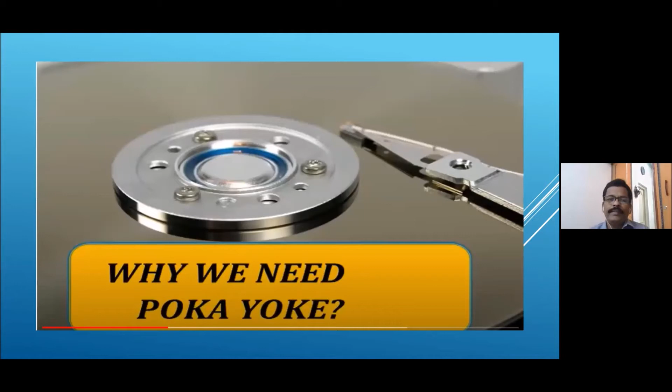So why do we need this Poka-Yoke? Most of the time we are blaming others when mistakes happen. Normally we say, I did not do it, it's his fault, it's not my fault, it was not me. All these things, we blame others instead of finding the root cause for the issue.

Normally, most of the time the mistakes are mainly because of human errors. Human errors include misunderstanding, forgetfulness, wrong identification, lack of experience, lack of standardization, unexpected errors, and intentional errors also. Sometimes people will make mistakes intentionally to create an issue, for example if there is some problem between a boss and him, he will make a mistake, and finally that leads to a component defect or some scrap.

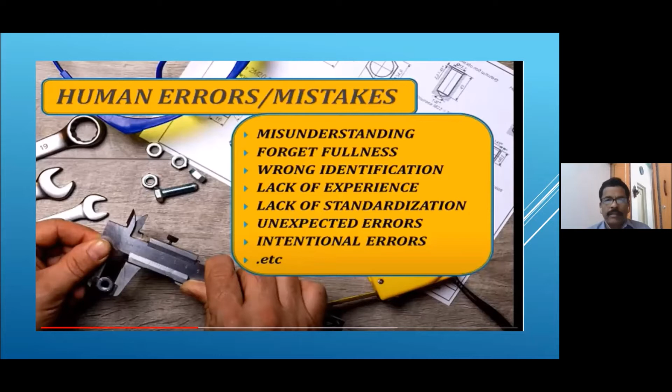So before going to Poka-Yoke, we would like to know why we need to implement Poka-Yoke. Otherwise, without implementation, why is it not possible to resolve the mistakes? For that, we need to understand about mistakes.

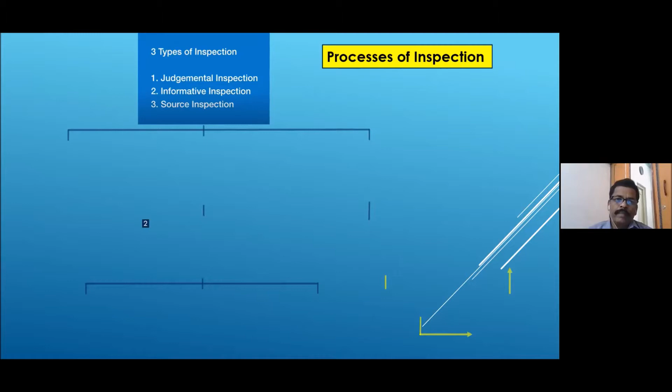The three types of inspections. Inspections are very important in the manufacturing line. The three types of inspections are judgmental inspection, informative inspection, and source inspection.

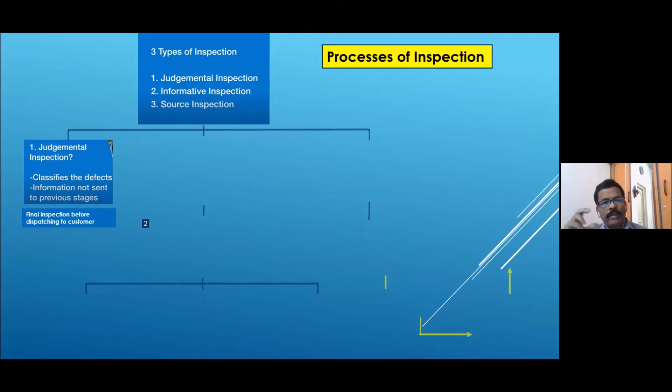Judgmental inspection is nothing but the final inspection. Before delivering the component to the customer, all components need to be inspected thoroughly, and the defects and problems are collected, but that information is retained with them only. It will not go back to the respective department.

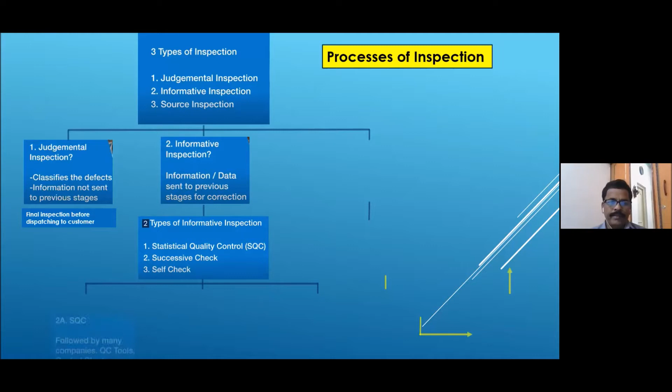The second inspection is informative inspection. Informative inspection is information and data - they collect the information and data and pass it on to the previous stage to stop or eliminate the error. The informative inspection contains three stages: statistical quality control, successive check, and self-check. Statistical quality control is followed by many companies using QC tools, control charts, quality circles, etc.

A successive check is when A sends a component to B, and B checks every component before starting the process. That means before producing the component, B will check all the components thoroughly. That is a type of successive check.

The self-check is when A sends components to B, and A checks every component immediately after producing it, before sending to B. So after producing the component, A will check the component parameters thoroughly before passing it to the next process, so that in case of any error, that component will be held at that particular stage itself. That is called self-check. Both judgmental inspection and informative inspection will not stop or eliminate the error or defect.

So it will reduce defects, but the defect may repeat again. So how do we stop defect production in the manufacturing line?

Through source inspection. Source inspection means all the parameters are checked before producing the component - that means machine parameters, fixture parameters, component parameters, all these things we need to inspect thoroughly. If those parameters meet the standards, then only the component will start producing; otherwise, the particular issue will be resolved and then they will start producing the component.

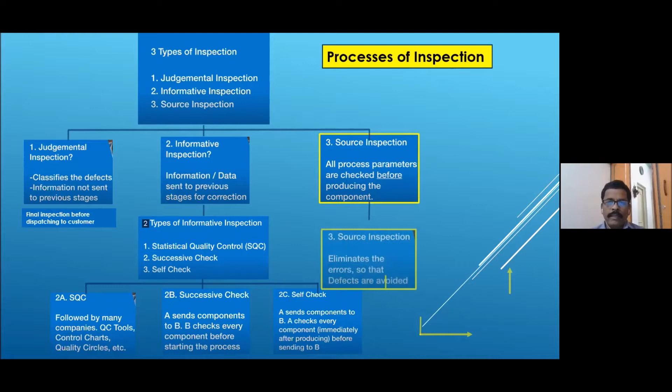That means source inspection eliminates errors so that defects are avoided. Source inspection results in zero QC - eliminating the quality control activity. Source inspection is achieved through Poka-Yoke. This is how Poka-Yoke works: even though the inspection process is there, problems repeat again, but the volume of defects is reduced even though defects repeat. How to eliminate it 100%? That is the purpose for which Poka-Yoke has been created.

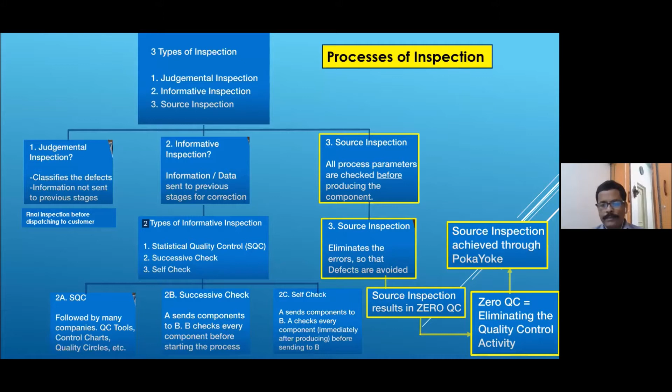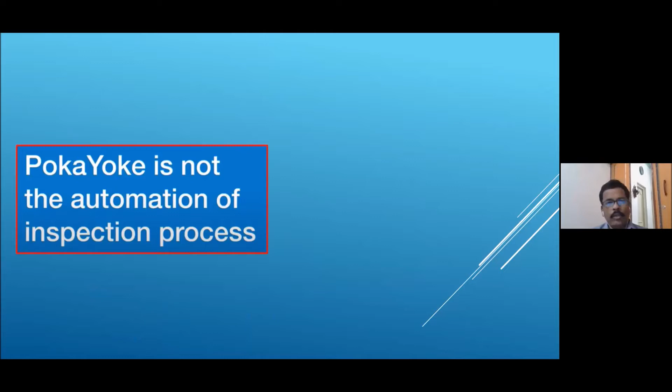Poka-Yoke is not the automation of inspection process. Many people think Poka-Yoke is the inspection process itself, or that if they create some methodology to identify the defect, that is Poka-Yoke. No, that's not Poka-Yoke.

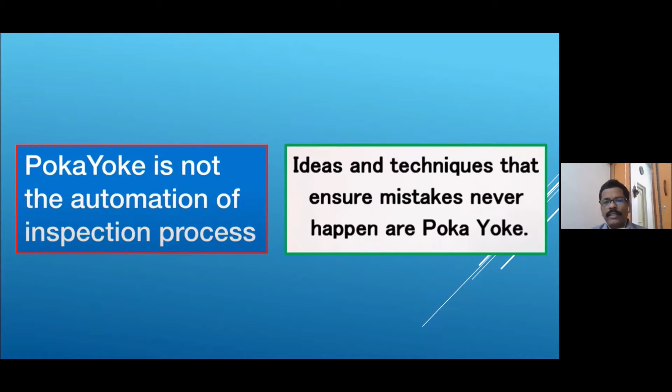Poka-Yoke is actually ideas and techniques that ensure mistakes never happen. Before producing, at the time of manufacturing itself, we need to identify the idea or technique we need to implement so that mistakes never happen in the manufacturing line. That is called Poka-Yoke.

There are two types of Poka-Yoke: the setting method and the regulatory function method. The setting method is how the system works - we need to understand and develop the Poka-Yoke. The regulatory function is how the system communicates. By understanding that, we can develop the control type Poka-Yoke and alarm type Poka-Yoke.

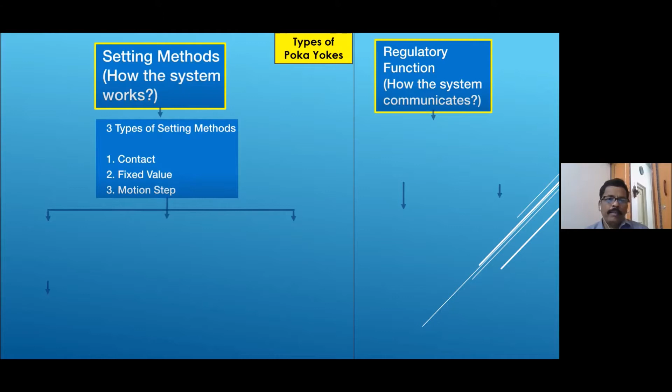The three types of setting methods are contact method, fixed value method, and motion step method. The contact type is like a USB pen drive - these are all contact type Poka-Yoke. Defect is prevented through contact. So if you reverse a USB pen drive, you can't fit it into the slot. That is the contact type Poka-Yoke.

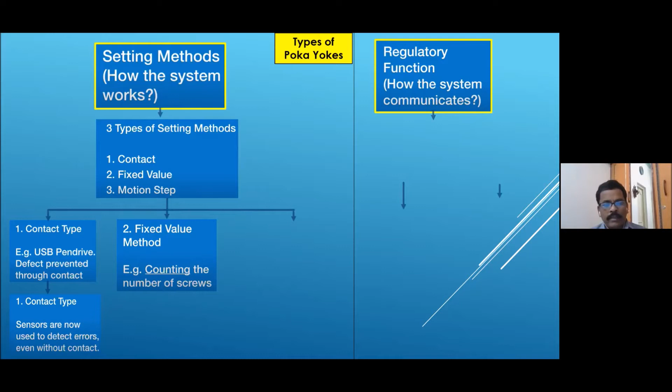Sensors are now used to detect errors even without contact. The second one is the fixed value method - counting the number of screws. In a manufacturing assembly line, you have to put 10 screws. If you put only 8 or 9 screws, the system will not allow further production. That type of Poka-Yoke is called the fixed value method.

The third one is motion step, which follows the sequence of activities. Suppose you need to assemble a product in a particular sequence, but you miss a step - the system will not allow you to proceed to the next step. It's called motion step. These three are all called setting methods.

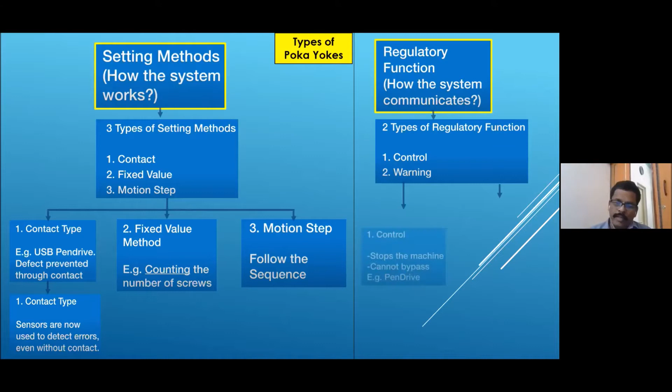The regulatory function method is how the system communicates. There are two types: control type and warning type. The control type will stop the machine, and you cannot bypass the system. It's called control type.

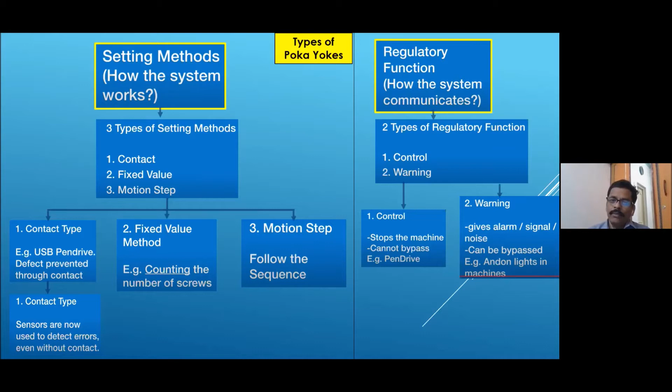Warning type gives an alarm signal or noise, and it can be bypassed. Out of these two, control type Poka-Yoke is always better, because with warning type Poka-Yoke, there's a possibility of the operator bypassing the alarm, which can produce a component with a defect. So always think of the control type.

There are 10 errors where you can use Poka-Yoke. Number one, processing omissions - a step was forgotten. For an assembly or production process, various steps are there. If you forget to manufacture a particular step, the process will not allow you to the next level. That's called processing omission - a step was forgotten.

Number two, processing errors - something was done incorrectly. Suppose drilling and boring operations are there. Instead of drilling, if you start directly with boring, it will damage the tool. So the machine will stop, and will not allow the boring process without the drilling operation first. It's called processing errors.

Number three, error in setting up the workpiece. Before mass production, you have to set up the fixture or jig. Any error made in the fixture or jig will lead to component scrap. So your Poka-Yoke system will not allow that type of error during manufacturing.

Assembly omissions - a part was forgotten. You have to assemble one gearbox with various parts, maybe 50 parts. If you miss one part of the gearbox, it will lead to a defect, noise development, or it may get damaged. If you implement Poka-Yoke in such an area, the system will not allow the assembly process to proceed further.

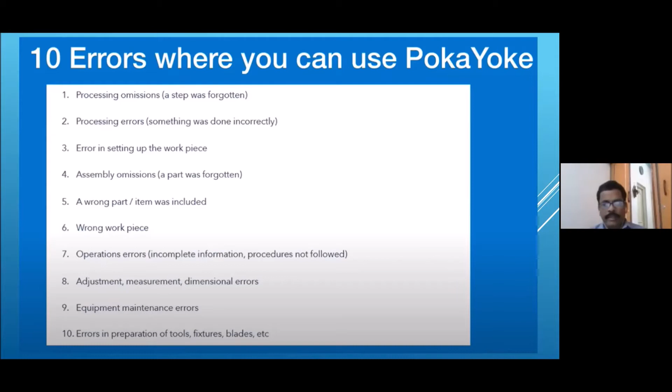There are 6 ways of using Poka-Yoke: elimination, replacement, prevention, facilitation, detection, and mitigation.

The elimination of unwanted processes or mistakes means downloading machine data rather than entering it manually. Nowadays machines run with CNC, computerized numerical control. For every product you have to change the program, and many times people enter the program manually, which leads to manual or typographical errors that cause component defects. To avoid that, you can scan the data or copy paste it. If you do it like that, errors won't happen, and you can manufacture mistake-proof or defect-free products.

Replacement means replacing the step with a more reliable process, such as scanning data instead of manual entry. In your final assembly area, many people enter barcoding numbers manually. Instead, you can scan the barcode and deliver the product to the next stage. That will reduce or eliminate the error permanently.

Number 3, prevention: change the process so that mistakes are not possible to make. For example, a USB pen drive - even if the operator tries to make a mistake, he can't. That's the way you need to develop the Poka-Yoke system.

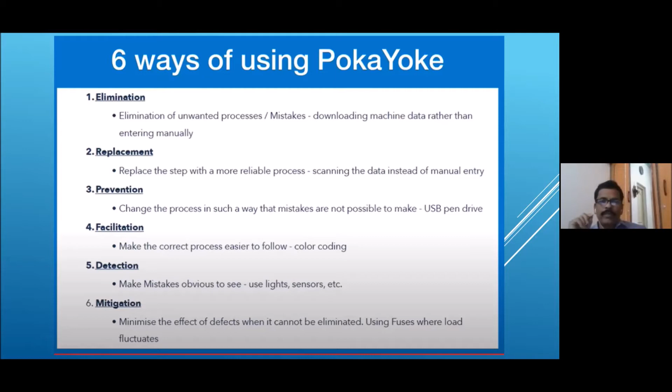The benefits of Poka-Yoke include reduced training time - anybody can be engaged with machine operation, even operators with very little knowledge of the machine area, if strong Poka-Yoke is implemented in the machinery. Even if the operator tries to make a mistake, the machine will not permit starting; otherwise it will indicate to the operator to fix it properly. Other benefits are improved safety, reduced waste (scrap or rework is eliminated), higher productivity since we can produce more components, and promoting a culture of continuous improvement. Operators get motivated, and the culture of the total organization also changes.

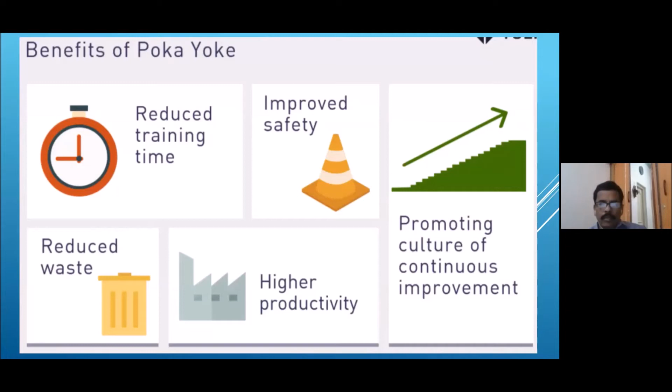Steps towards implementation of poka-yoke: there are four stages when implementing poka-yoke, for how to set up mistake proofing. Step 1 is to keep firmly in mind...

Everyone makes mistakes, but I am responsible for those mistakes as a manager. Sometimes managers think it is the operator's job - they were given the job and recruited with a salary, so it's their responsibility to produce components without mistakes. Some managers think this way, which demotivates the operator and affects their morale. Instead, you should think it is my responsibility to eliminate the operators' mistakes by providing a proper poka-yoke or foolproofing system - it's attitude related. You may think that's just mental theory, but as long as you blame others or your workers, you cannot think of poka-yoke. If you simply blame an operator, your mind will not work, and you cannot introduce any poka-yoke ideas. It's more important than you think to change your mindset, and I will make poka-yoke.

So you have to think, yes, it's possible to make poka-yoke. So how to make poka-yoke? You have to think positively, then your mind will give more ideas. I'll make the poka-yoke process - in order to do that, what should I do?

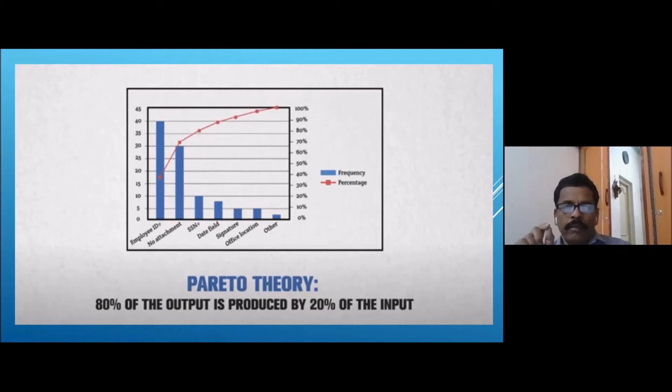Step number 3: find the root cause of the vital few mistakes and design a control poka-yoke or warning poka-yoke. After Pareto analysis, we have to find the root cause and take permanent action for the defects. With that, we have to finalize whether it should be a control poka-yoke or a warning poka-yoke, decide, and implement it further.

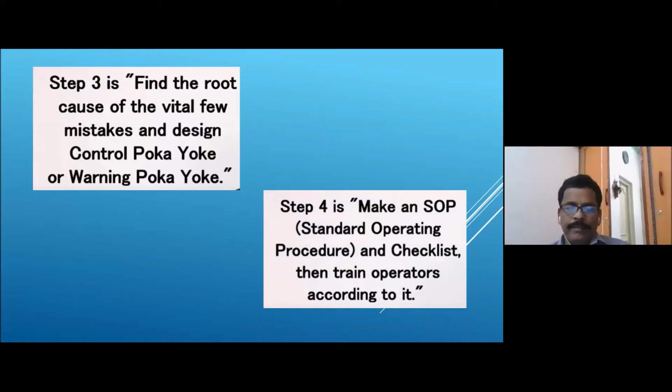Step 4 is to make an SOP, standard operating procedure, and a checklist, then train the operators accordingly. Once poka-yoke is implemented, make an SOP and a checklist. With that, you have to train the operator, then implement it. This is the way - totally 4 steps are there in implementing poka-yoke.

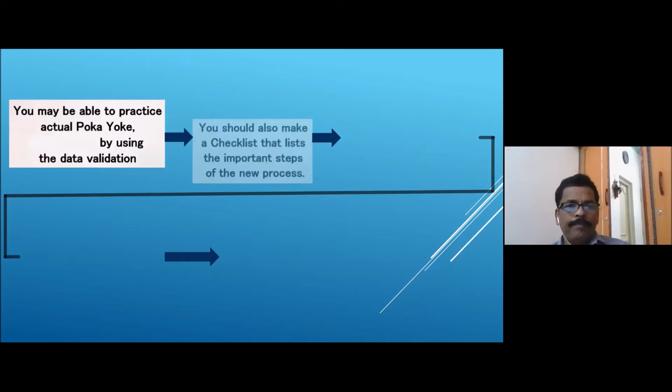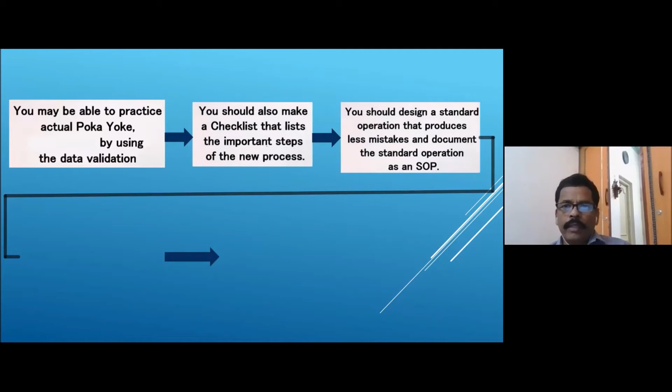You may be able to practice actual poka-yoke by using data validation. Then you should also make a checklist that lists the important steps of the new process. Step 3: you should design a standard operation that produces fewer mistakes and document the standard operating procedure.

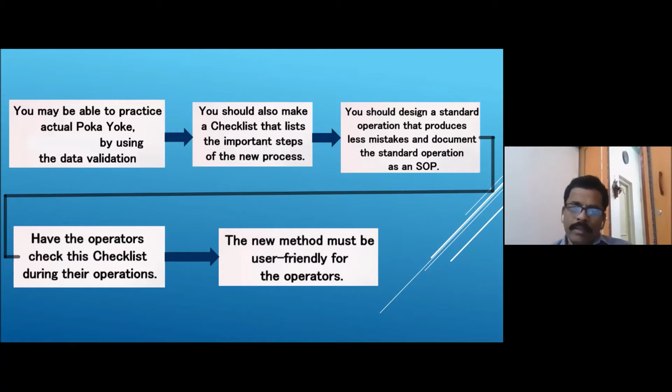Have the operators check this checklist during the operation. We have to discuss with the operator, or they will get demoralized. The new method must be user friendly for the operator - this is very important. If it is not user friendly, the operator will try to bypass the poka-yoke system and produce a component without your knowledge. It should be user friendly.

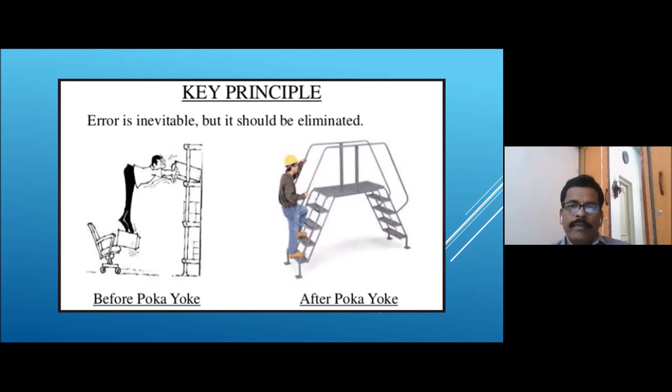Simple example of poka-yoke: before poka-yoke, the person tried to pick some boxes which could lead to an accident for him, and the component falling down could damage it. We have to make a poka-yoke and develop a system to ensure no mistakes happen to humans - a permanent disability may occur, and the component may also be damaged, affecting profitability.

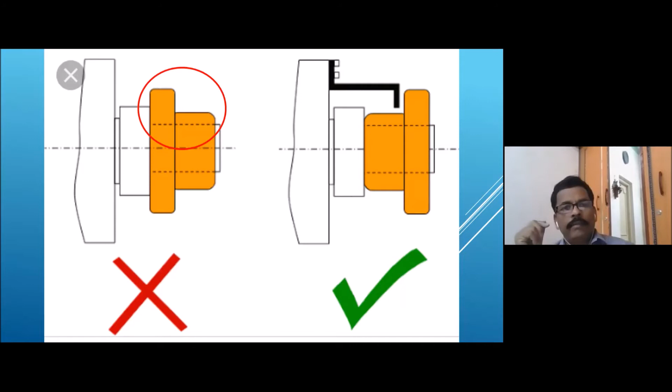You see these two components - one is the okay method, one is the not okay method. This component is wrongly fitted. Why is it possible to fix it both ways? You see this is a spindle; on the spindle a fixture is there, and on the fixture some component is fitted. The component configuration is able to fix in both ways, which could lead to an accident of the equipment or machine, or damage the component.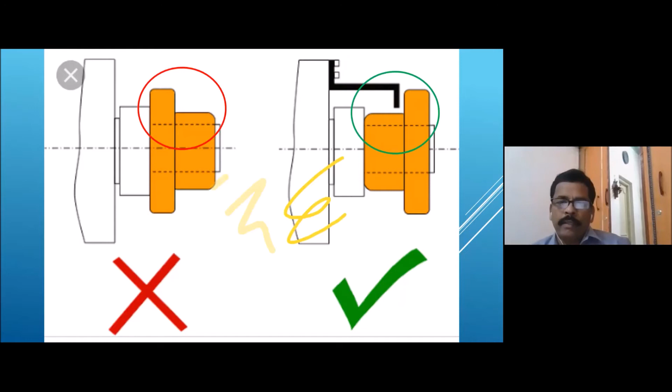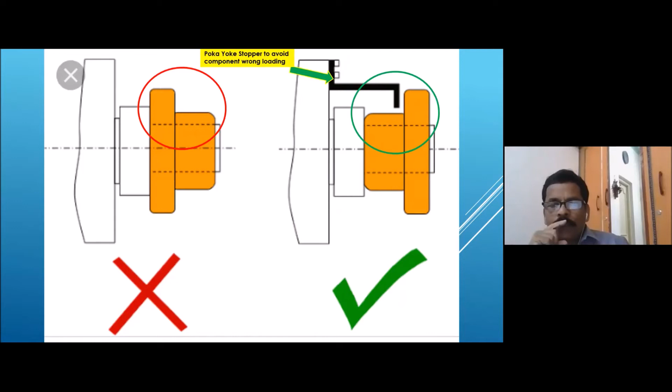This is the okay way - the right way to fix a component. This is the poka-yoke idea: a bracket which will stop the component from being pushed inside the fixture in the wrong way, so it will not permit the operator to fix the component incorrectly.

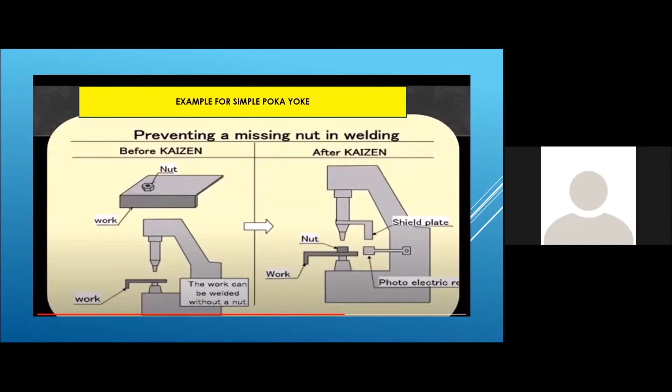Another example of poka-yoke: here, this work can be welded without the nut also. You see both pictures - one is work where the nut is fit, which is actually a spot-welded type of nut. It is possible, even if the work plate is not there or the nut is not fixed, to still proceed to the next operation.

You see the second picture - a photoelectric sensor is introduced. In case the nut is not fixed on the work, what will happen? The press ram will come down, it will be sensed by the photoelectric sensor, and it will stop the equipment. It will not weld the component or damage the fixture, so the product cannot be delivered without the nut. This is a simple way of implementing poka-yoke.

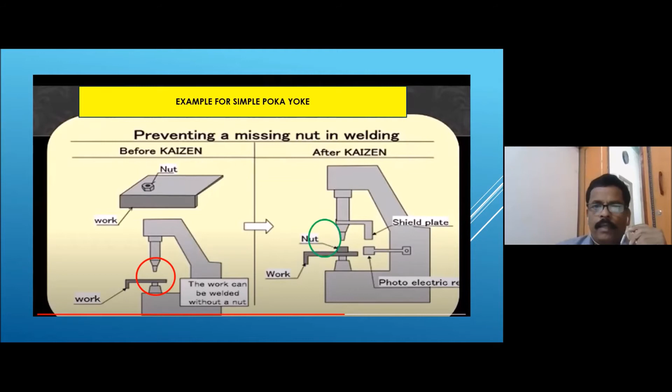Welding cannot be done during absence of nut. If nut is not there, the machine equipment will not weld the fixture, or it will not damage the workpiece.

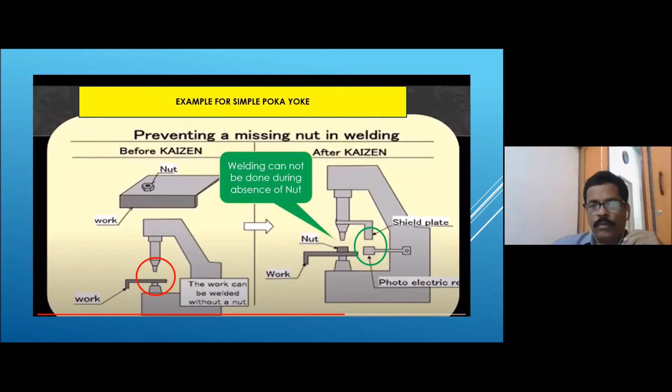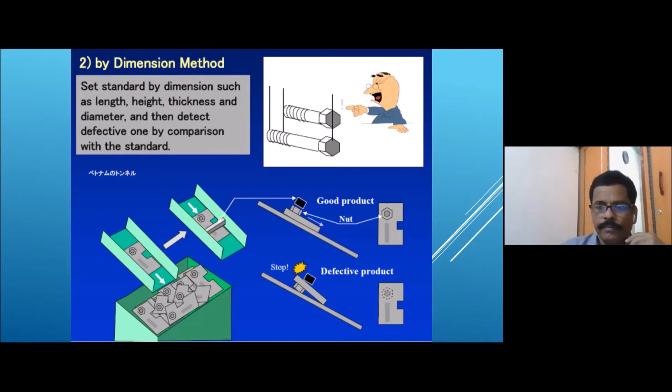This is also a shape method. This is the right component, defective component, and a good product - two types of products are there. If both come in a mixed way, people will think why we are allowing defective components into the process line.

These are all human errors. It may happen sometimes because of operator error, or at the IQC inspection, the input quality inspection area, they miss out 1 or 2 components out of 1,000 components. They will miss one defective component.

What you have to do is introduce a small type of conveyor. In case the pin type component is not coming in properly, it will not permit the next process. That is how you need to develop the poka-yoke system.

You see the second picture, the defective product and correct product. The component can be fixed in either way. To avoid that, if you introduce a small guide pin, it will permit the component in the particular correct way only. Otherwise, it will not permit the operator to fix the component on the fixture.

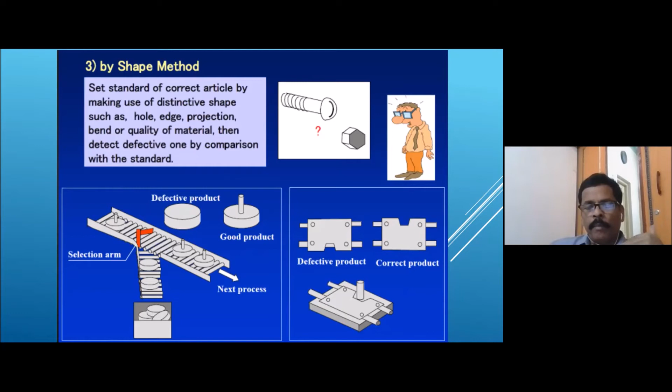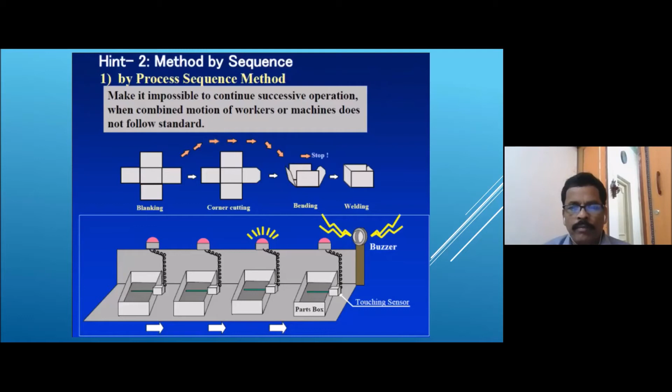This is also the same way, a sequence of operation - A, B, C, D, E, F, G, H, I - these are the stages of the assembly line. In case at A, B, C, D you are not picking up the component or not ensuring stage by stage, if you are not ensuring the E process, then it will stop your cylinder operation at the final end process.

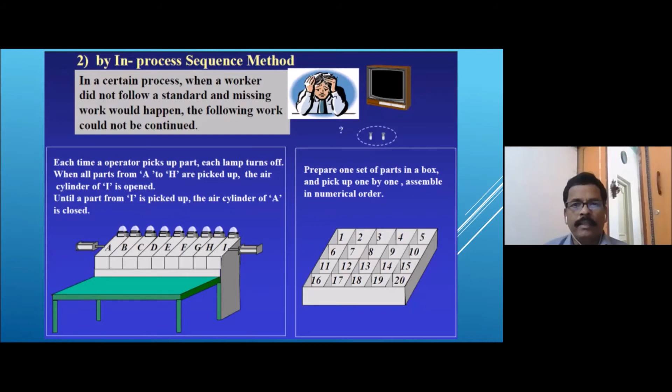Like that, you have to think according to your process to ensure there is no defective piece or component goes to the customer or next step. That is the purpose of poka-yoke.

It is detecting a fixed number. Numbers such as pressure, electric current, temperature, or time and so on are fixed to control. When detected numbers exceed the value, the work or operation cannot be continued.

For example, equipment air pressure - normally 6.5 kg per cm square pressure is required for machine operation, that is the minimum pressure. We must ensure the pressure meets specification; otherwise it will lead to accident or component ovality or bore ovality. That's why ensuring air pressure is very important.

Temperature - in some washing machines and similar equipment, the temperature of the liquid is very important. The temperature of the liquid should be more than 80 to 90 degrees; if it is only 50 degrees, the component may produce a defect in the next process. So we need to ensure the temperature of the particular liquid in the equipment.

Oil level - hydraulic oil level, lubrication oil level, coolant oil level, many oil levels are there. In case oil levels are low, the machine will malfunction, leading to accident or producing a component defect.

Thickness, electric current, voltage are also very important. During welding operation, if the current and voltage are not set properly, it will produce a defective component. All these we can automatically link with the poka-yoke system.

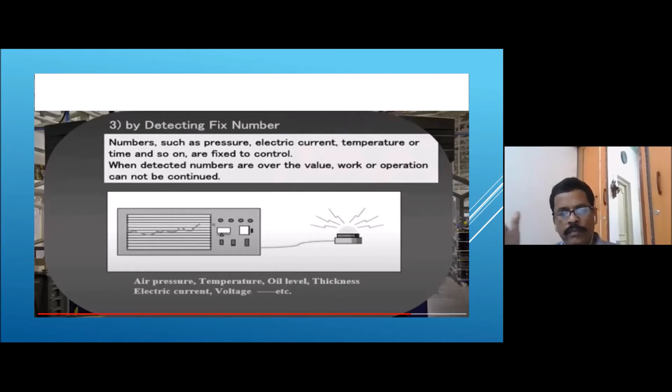Likewise, you see here equipment - all the washing machines. The washing machine temperature is very important, along with the time factor. If it exceeds the time, the component may also get damaged.

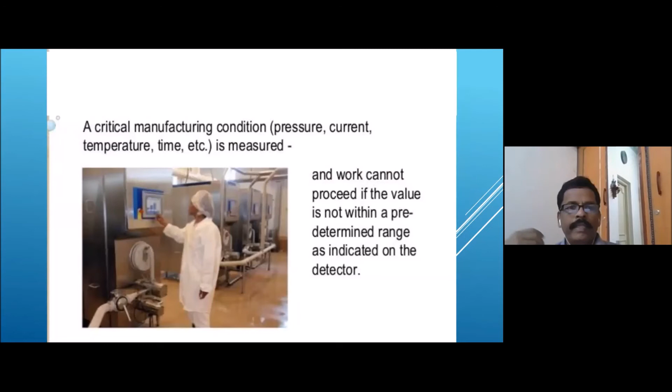Motion stop. This type of device ensures that a correct number of steps have been taken and possibly also a sequence of steps. An example could be the use of a nut runner to tighten a specific number of bolts to a required torque.

Suppose there is an automobile gearbox. When you fit the end flange, there are 10 bolts. If you don't tighten all the bolts equally, it may lead to oil leakage from the gearbox. The sequence of tightening is also important. Opposite bolts should be tightened; if you continuously tighten the peripheral bolts, it will lead to mismatching of the end flange and also cause oil leakage.

To ensure proper tightening, the proper torquing of the nut runner is very important. If you tell the operator to tighten the nut properly with a particular torque using a torque wrench, they will tighten it, but for some components or companies, operators may not tighten properly with the respective torque. To avoid that, we can introduce this type of poka-yoke.

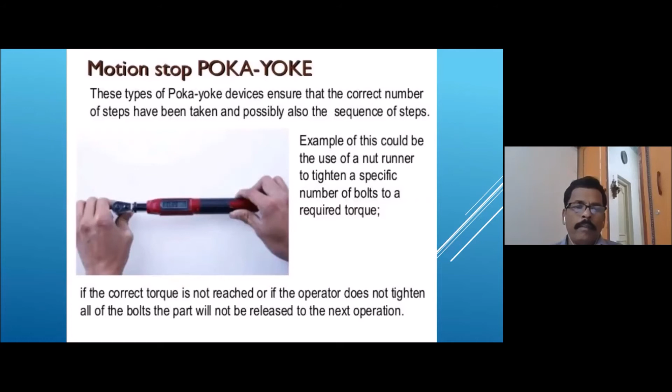So this ensures automatic torquing. When tightening 10 nuts or bolts, even if one nut is not properly tightened with the specified torque, it will not allow the component to move to the next process. This is a positive way of a poka-yoke system.

Poka-yokes are used in day-to-day life also. So far we've discussed manufacturing lines or mass production systems, but most of us think it's only applicable to manufacturing industries, not day-to-day life. That's not true - we use many poka-yoke mechanisms daily without understanding that they are poka-yoke.

You see poka-yoke 3-pin plugs in computers and many other devices. The plug has 3 pins - if you reverse the plug, it will not enter the socket. Same with a SIM card - everybody knows the SIM card has one corner cut flat. This is to avoid mispositioning of the SIM. If you try to position it in reverse, it will not enter the mobile phone.

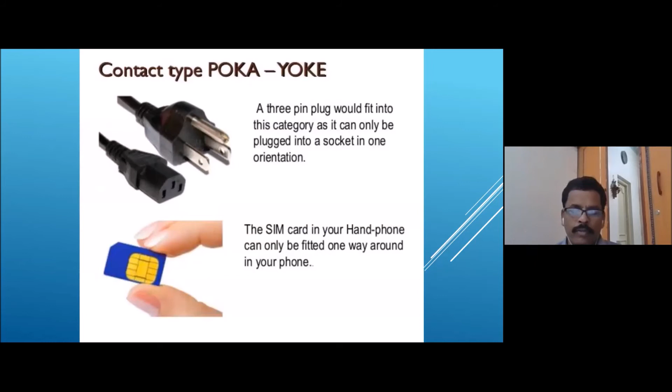Nowadays cars are integrated with collision warning and brake support. It will give a 10 meter collision warning to the driver, and even if the driver doesn't observe it, the automatic braking system will energize and stop the car.

The latest generation cars are equipped with collision warning and automatic braking systems. In case a collision may happen within a specified distance due to driver unconsciousness or mistake, it will inform or create awareness to the driver through an alarm or light indication. The collision warning indication starts immediately. Even if it's not observed by the driver, the automatic braking system will actuate immediately and stop the car to avoid hitting the opposite vehicle.

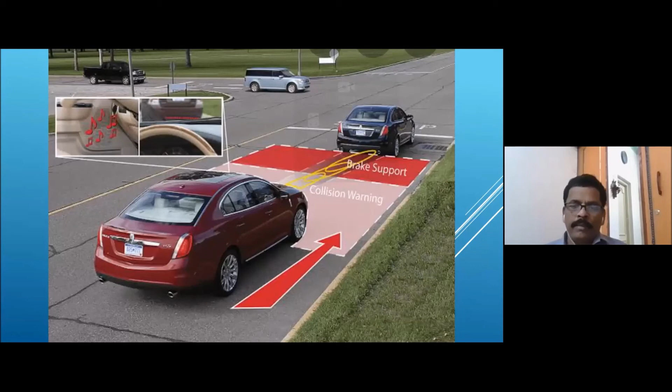In our vehicle cars, the petrol fueling area has 3 types of mistake proofing devices. Number 1: the filling pipe inlet keeps larger leaded fuel nozzles from being inserted. So your petrol and diesel nozzles will not match - diesel nozzles will not match with petrol vehicles. They developed poka-yoke for that too.

Number 2: the gas cap does not allow the motorist to drive off without the cap. So your closing cap, if it's not fitted properly, will not allow the vehicle to drive without closing that cap. Not all cars have this, but some advanced new generation cars have this type of facility.

Number 3: the gas cap is fitted with a ratchet to signal proper tightness and prevent over tightening. So the gas cap, meaning the petrol nozzle cap, when you tighten it...

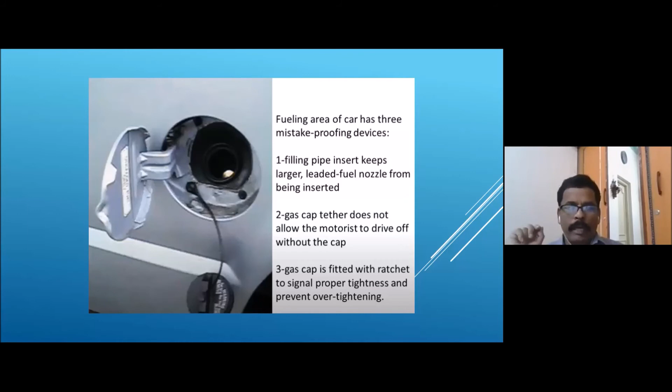Some noise, a ratchet type of noise will develop. To understand adequately, we tighten the nozzles - that is enough. It is indicating the tightness of the particular cap. Otherwise, people will over tighten and will damage the cap also.

In electronic door locks, there can be 3 mistake proofing devices. Number 1, it ensures that no door is left unlocked. So if you want to drive the car and one of the doors is not locked, it will indicate immediately by lighting or something.

Number 2, doors automatically lock when the car exceeds 18 miles per hour. Even if you haven't locked all the doors, or automatic locking is not operated, once the vehicle speed increases to 18 miles per hour, the doors get locked automatically. These are all this type of mistake-proofing only.

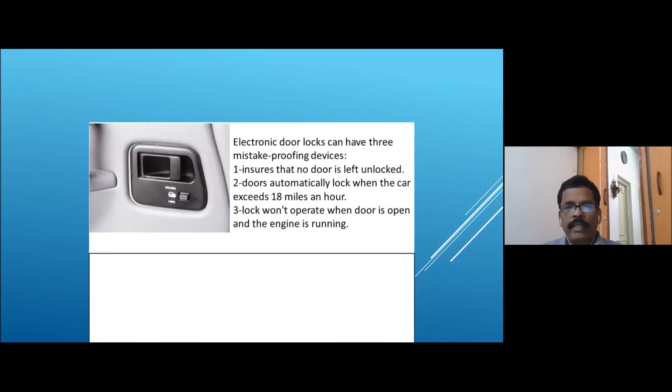So the lock won't operate when the door is open and the engine is running. During engine running time, you can't operate the lock also. This type of 3 interlocks - these are interlocks.

So in automobile controls, there's a mistake-proofing device to ensure that the key is in the on position before allowing the driver to shift out of park. The keys cannot be removed until the car is in park.

Everybody knows warning lights alert the driver of potential problems. These devices employ the warning method instead of the control method. On your dashboard, you see petrol level low, temperature is more, various indicators - these are all warning type devices.

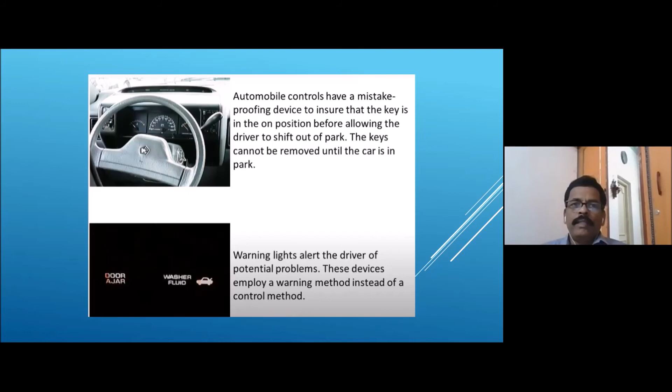Now, new lawn mowers are required to have a safety bar on the handle that must be pulled back in order to start the engine. If you let go of the safety bar, the blade stops in 3 seconds or less. So the lawn mower always needs to be operated by holding the safety bar. Otherwise, if you release it by mistake or due to fatigue, automatically the blades will stop. Otherwise, if it is an independent type of operation, it may lead to an accident or damage to the floor or even to a human.

Circuit breakers prevent electrical overloads and the fire that results. When the load becomes too great, the circuit trips - even our MCBs, all these things work the same way. If the temperature or current flowing exceeds your target or specification, it will trip automatically.

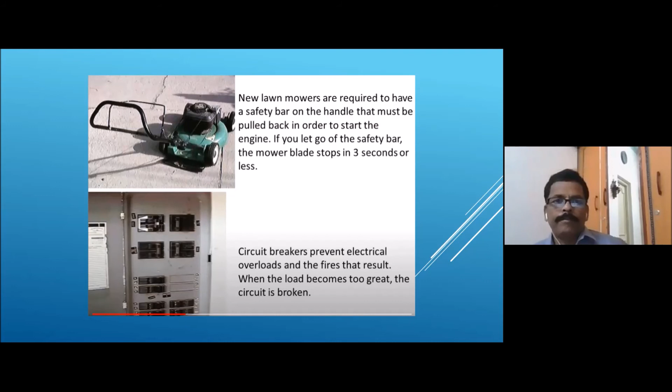Even our bathroom sinks have a mistake proofing device - it is a little hole in the basin. When you are filling it and excess water comes, it will overflow through that hole and go back to the drainage. Otherwise, it will overflow onto your floor and affect the floor also.

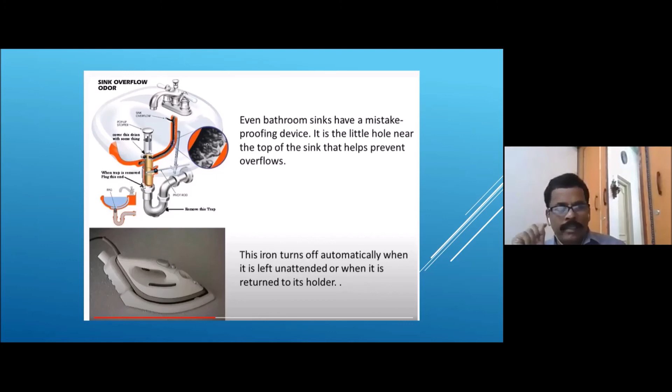Iron boxes turn off automatically when left unattended, or when returned to the stand - everybody knows this. When you set something, automatically it will cut off once reaching the temperature. These are automatic, everybody knows it, and we use this in daily life also.

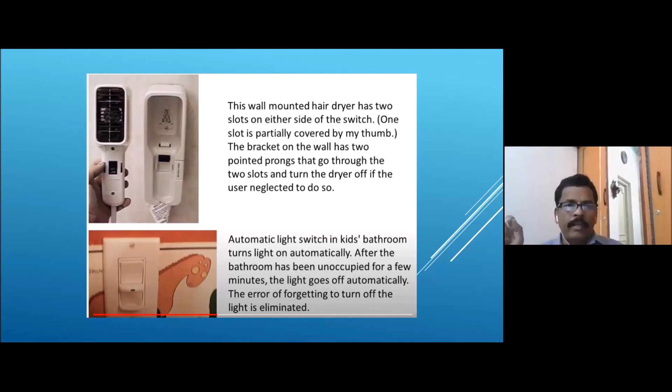Here's a wall-mounted hair dryer. It has 2 slots on either side of the switch - one slot is partially covered with a thumb. The bracket on the wall has 2 pointed prongs that go through the 2 slots and turn off the dryer if the user neglects to do so. Even if you're not switching off your dryer, when you put it in the location, it automatically gets off.

Parking garages have low clearances to ensure that cars entering the garage will fit, similar to go and no-go gauges we use in equipment. Same way, entrances also have a fixed, specified height. Vehicles taller than that height will not be permitted in the parking lot.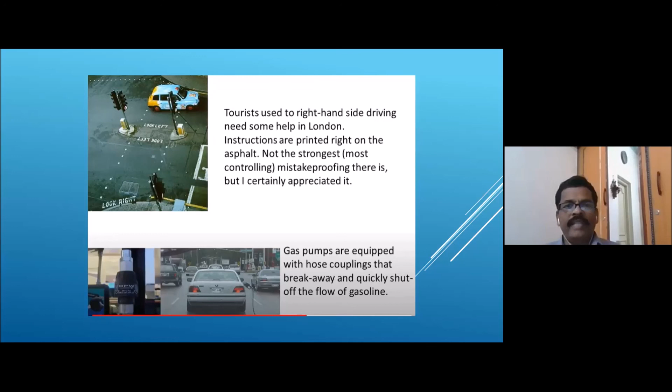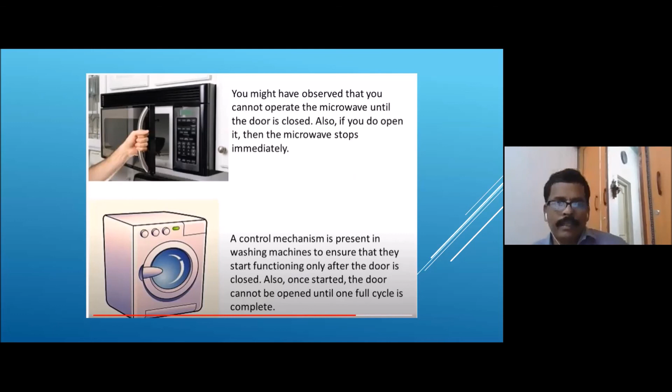You might have observed that you cannot operate the microwave until the door is closed. Also, if you open it while running, the microwave stops immediately - it's all interlocks, a type of poka-yoke. Same way, washing machines have a control mechanism to ensure they start functioning only after the door is closed. Once started, the door cannot be opened until one full cycle is complete. Many such automations are nothing but poka-yoke - these are also types of poka-yoke.

Utensils made of specific metals only work on the heating plate of the induction cooker. If you use utensils with a bottom of a different metal, it gives out a beep. Also, some work only for flat bottom pans and give a warning signal if round bottom pots are used. One more error detecting mechanism is that if the cooker is left in the on mode for a while, it switches off on its own after some time. This prevents shocks and fires - this is also a type of poka-yoke.

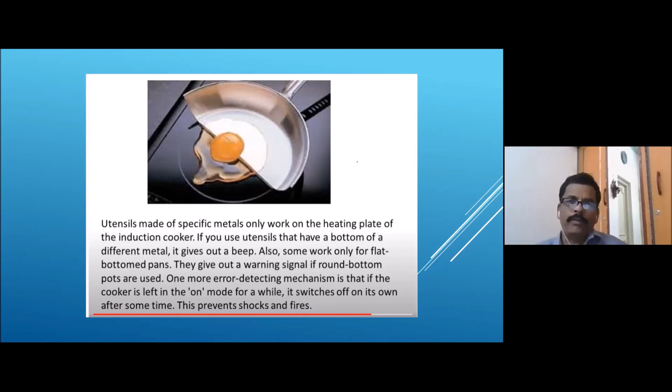Everybody has actually experienced this at home - it's a simple poka-yoke. When parking our car in the garage, we don't know the distance, so we need two people to give direction on how much we can come forward. To avoid that, only the driver should be able to understand the exact parking location to avoid hitting the front of the vehicle. So we hang a small ball that touches the windshield of the vehicle - that is the exact position for parking. Accordingly, we need to finalize the ball position.

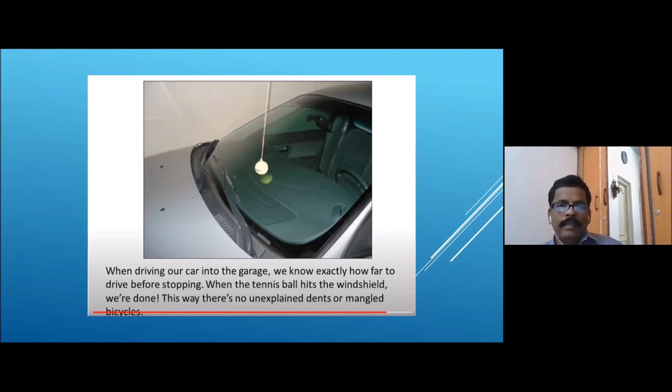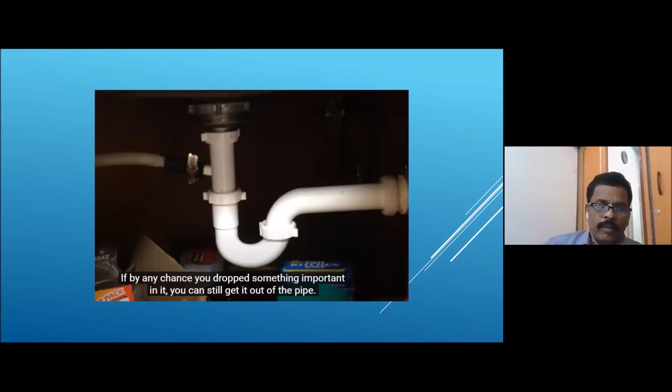For the wash basin sink, they developed a bottom elbow bend design. By designing it like this, if you forgot and put something in the pipe, you can open the bottom portion and take it out. Otherwise, it would go directly to the drainage. This is the mechanical poka-yoke. Thank you very much.